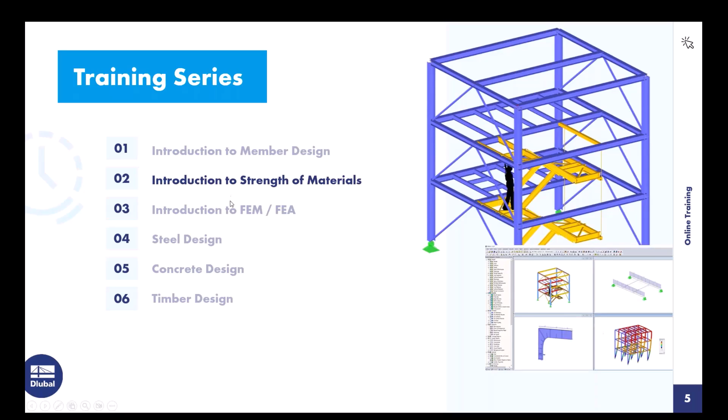This brings me to today's training program. I will first give you an introduction to the RSECTION program. Using several examples, I would like to show you the modeling options and design methods in the program. On the first example, a thin-walled I-profile is modeled with graphic functions. I will model this slowly so that you can enter this cross-section as well. In another example, I show how to insert cross-sections from the database and how you can add other parts to these cross-sections. Then I show the modeling of a massive cross-section based on a DXF template. Finally, I model a hybrid cross-section.

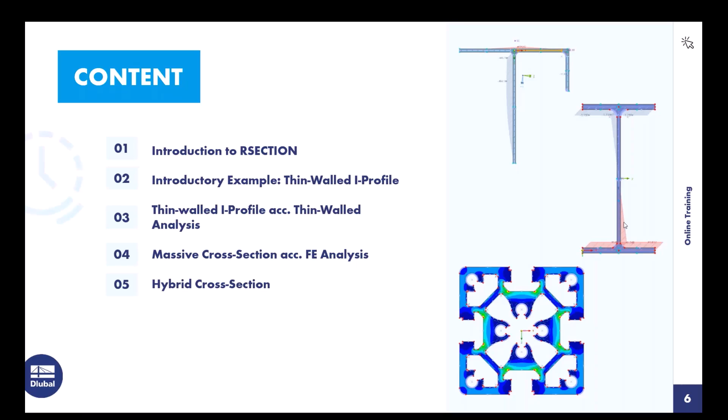RSECTION is an independently executable program for generating any thin-walled or massive profiles. If you want to design special profiles in RFEM or RStab that are not contained in the profile library, you can create them with RSECTION. You can then import these user-defined profiles into RFEM or RStab. In RSECTION, it's possible to calculate cross-section values and stresses.

The RSECTION user interface is the same as in RFEM 6 or RStab 9. The cross-section graphics and dialogues are displayed in the working window. Most tasks can be performed with a mouse. In the tables below, the keyboard is primarily used for numeric input and output of results.

There are 3 navigators in the left pane of the working window: the data navigator, display navigator, and results navigator. The data navigator manages the input data. A double click on an entry opens the dialog. Here, if I double click on the points, the dialog will open, and then I can modify this point.

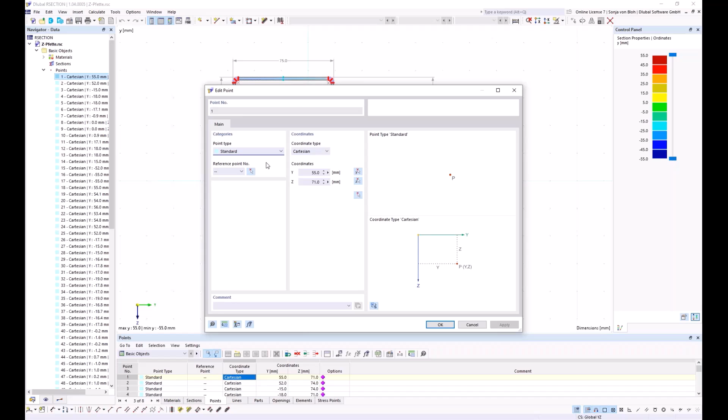It's also possible to open the dialogs for creating new objects. If I go to points, then it's possible here to add a new point.

The display navigator, I will turn to this, controls the graphical display in the working window. If the checkbox in front of an entry is unchecked, this object is hidden in the graphic. If I uncheck the points here, you see in the graphic the points aren't displayed anymore.

The result navigator controls which results are displayed. You can change here between statical moments, unit stresses, and so on.

Then I would like to go into the mouse functions. To move the section, you can hold down the mouse wheel and move the section accordingly. You can turn the mouse wheel to zoom in or zoom out, and right-click opens the context menu. You can also select objects with the mouse. If you open a window from left to right, everything that is completely within the selection area will be selected.

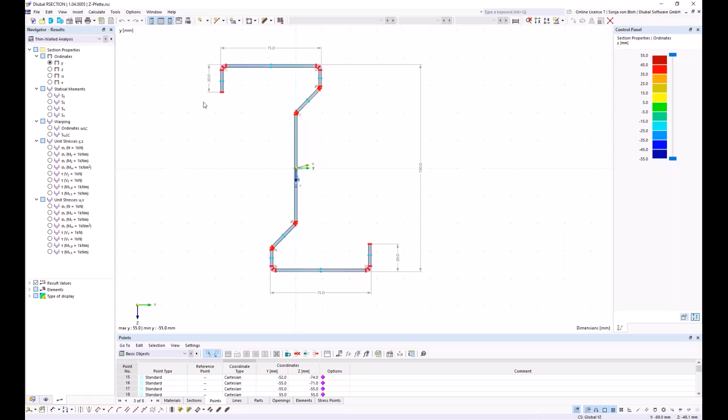If you drag a window from right to left, everything intersected by the selection area will be selected. You can also select individual objects. To do this, left-click on an object that you want to select.

To add objects to the selection, hold down the Control key and left-click on the next object you want to select. To remove objects from the selection, hold down the Shift key and click on the object you want to deselect. For the first part of the training, I am now starting a survey again.

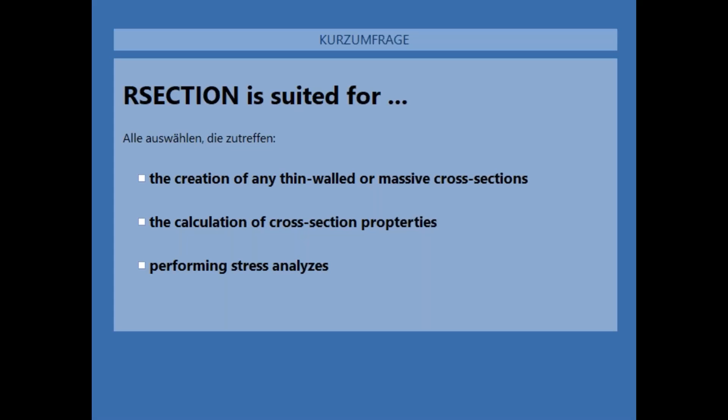All answers are correct. RSECTION is suited for the creation of any thin-walled or massive cross-section, and also for the calculation of cross-section properties and stresses.

This brings me to the first example. To create a custom cross-section, I open the new model window via this button here, and then I have to give the model a name. I name it here Example 1.

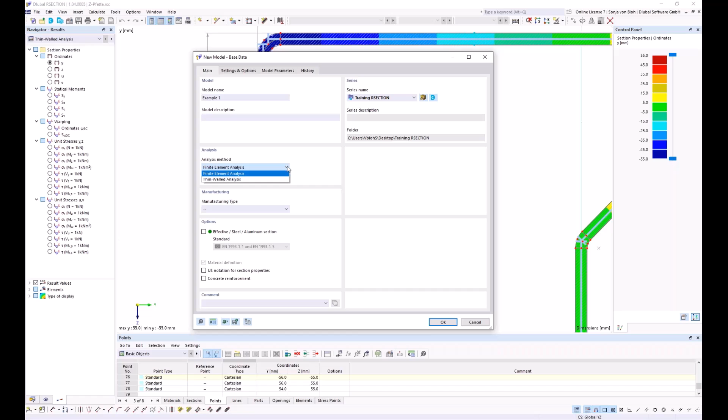Furthermore, the analysis method must be defined. This is here in this chapter, and the following analysis methods are available: finite element analysis and thin-walled analysis.

The effective cross-section can be calculated for both analysis methods after activating the extension here under the options. A standard must be selected according to whose rules the individual parts or subpanels are to be generated, and the effective cross-section is to be calculated.

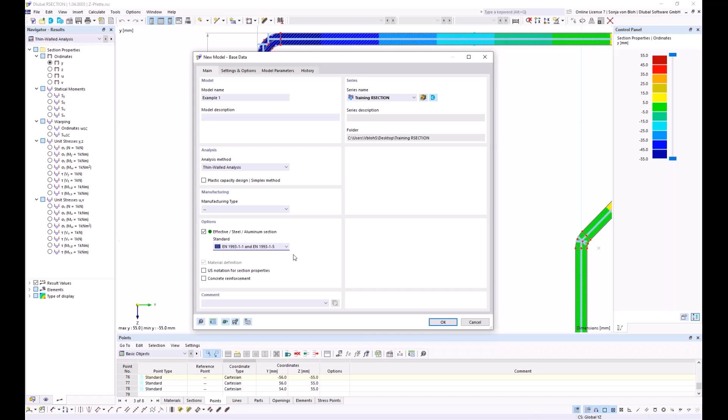The following standards are currently available: Eurocode 3 Part 1.1 for steel sections, Eurocode 3 Part 1.3 for cold formed sections, and Eurocode 9 for aluminum sections. I choose here the Eurocode 3 Part 1.1, and then I click on OK.

The selection of the design method or standard is irrelevant when using the RSECTION cross-section in RFEM or RSTAB. You can select the design method in RFEM or RSTAB regardless of what is set in RSECTION. Furthermore, the subpanels are generated in the design modules based on the standard selected in the design add-on.

In the steel design add-on, the manufacturing type determines which part of the standard is used for the design. For cold formed cross-sections, the standard Eurocode 3 Part 1.3 is used, and for hot rolled or welded sections, the standard Eurocode 3 Part 1.1 is used.

Now the file is created. I first define the material, and for this I open the Edit Material window. I can create or copy another material on the list via this button. This creates a new material, and this copies the selected material.

I can enter a material name here directly, and RSECTION then lists all materials that match that name. If I enter here 235, then RSECTION lists all materials with that name that are within this database.

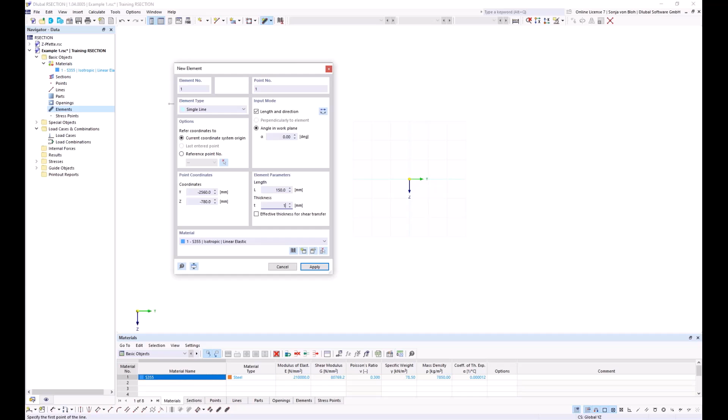I enter the element graphically, so I use this function single, and I enter the bottom flange here first. I choose the input mode, length and direction, and I choose an angle on the work plane of 0 degrees. I define for the flange a length of 150 millimeters and a thickness of 10.7 millimeters, and then I left-click here on the working window.

Then I create the web. Elements must be connected for the calculation of the effective cross-section. The connection is made via the start and end points of the elements. If two elements share the same points, they are connected.

For the web, I also use the input mode length and direction. Here I define an angle in the work plane of about 90 degrees, and I change the direction. Then I define the length of 289.3 millimeters and a thickness of 7.1 millimeters.

I create this web. Then I create the left flange, and for this I also use the input mode length and direction. Here I change the angle on the work plane to 0 degrees, and I change the length to 75 millimeters and the thickness to 10.7 millimeters.

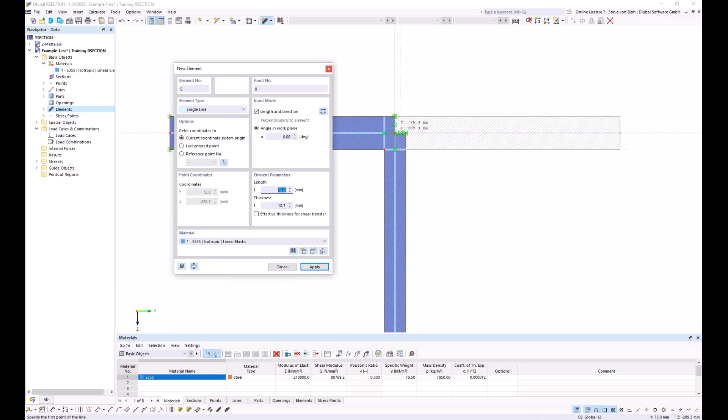Now I have to create the flange on the right side. For this, I reverse the direction, and then I create this element. I now click on the right mouse button. This closes my window. The profile should be a rolled T profile to which a lower flange is welded.

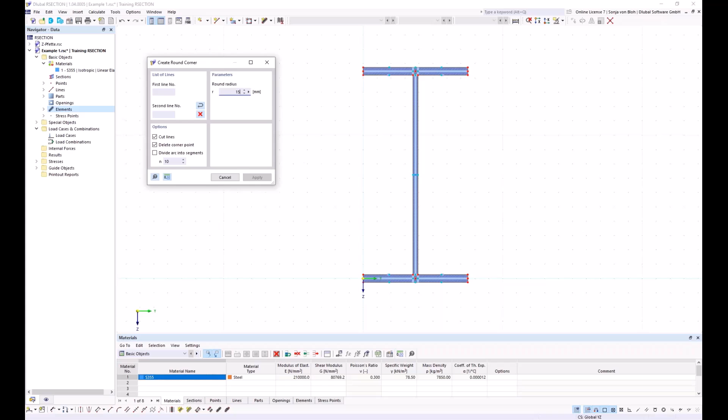The round radius is 15 millimeters. I can define lines to create them, or use the create round corner function. I find this function here below, and in this dialog I have to define the round radius. This should be 15 millimeters, and then I click on the corresponding lines.

Then I click on the right mouse button to close this window. The lower flange is welded with a 6 millimeter double fillet weld. I create the welds using the create angled corner function. I find this here. There are two corner types: both edges, where I can define the length of the edges, or the corner type edge and angle, where I can define just one length and an angle. You can also calculate in the dialog.

So I define 6 multiplied by the square root of 2, and I define here an angle of about 45 degrees, and then I click on the corresponding lines.

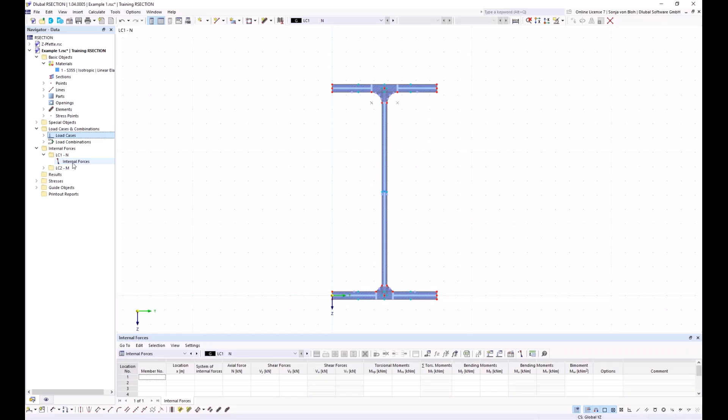I want to define the internal forces manually. For this, I go to the navigator data, open the tree internal forces, and then double click on internal forces. I want to define a compressive force, and compressive forces are negative, tensile forces are positive. Therefore, for a compressive force, I define here minus 10 kilonewton.

Then I click on apply and next, and I change the load case to load case 2. Here I want to define an axial force of 0 and a bending moment my of about 100 kilonewton meter.

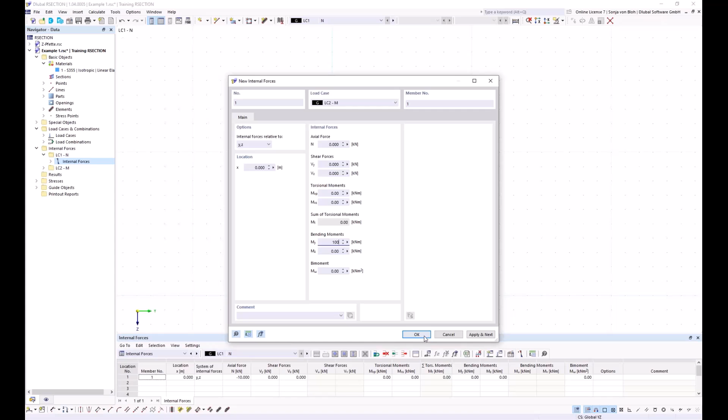And I click here on OK.

The blue dots that you can see here on the graphic are the stress points. Stresses are calculated and displayed at the stress points. The stress points are generated automatically, but they can also be defined manually.

I want to do that here, so I go to the navigator data again. I find the tree stress points, right click on it, and define a new stress point. It's possible to define the coordinates manually, or to select a point in the graphic and import its coordinates.

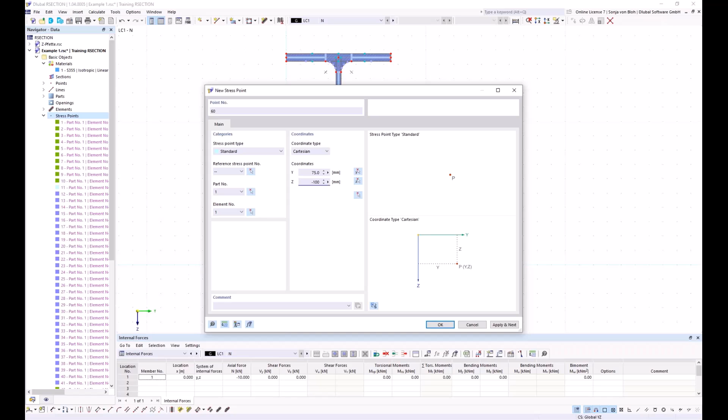I define here for the y direction 75 millimeters, and for the z direction minus 100 millimeters, and then click on OK. This stress point is now created. If I want to find it, I can right click on the stress point in the navigator data and use this function find, and you see now the stress point is located here.

Which stresses are to be calculated and output in tabular and graphical form can be set in the stress configuration, and you find the stress configuration also in the navigator data, under stresses, stress configuration. If you double click on it, the corresponding window will open.

Here via these checkboxes, you can check or uncheck the stresses that you want to calculate. Here, these stresses are calculated: the total normal stress, the total shear stress, and also the equivalent stress. I don't want to calculate more stresses, so I click on OK.

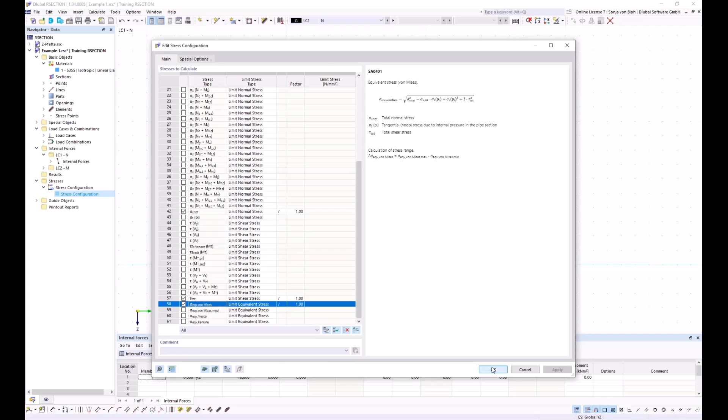I'll start the calculation now. For this, I choose in the menu calculate all.

In the result navigator, you can switch between the gross cross-section, this is the thin-walled analysis, and the effective cross-section, this is the effective thin-walled analysis. The same is possible in the result tables, where you also have the possibility to switch between thin-walled analysis and effective thin-walled analysis.

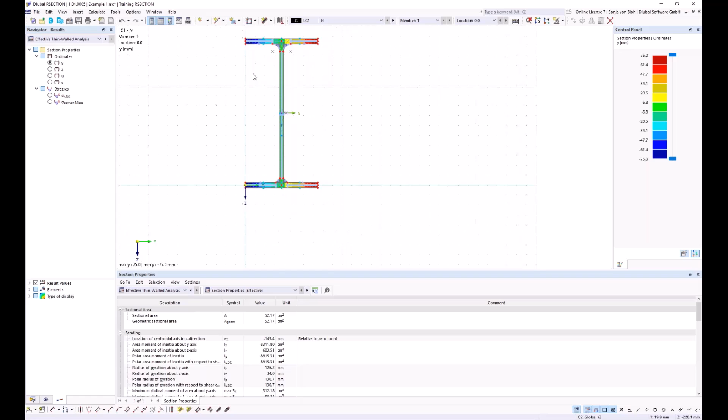Furthermore, you can switch between the results of the individual load cases, and you can also display the stresses. Now the stresses sigma x total are shown for load case number 1. If you want to see the stresses for load case 2, you have to choose that load case here.

I first look at the results of the gross cross-section of load case 1. The display type can be set also on the results navigator, where you can change the type of display. I change here, I choose off.

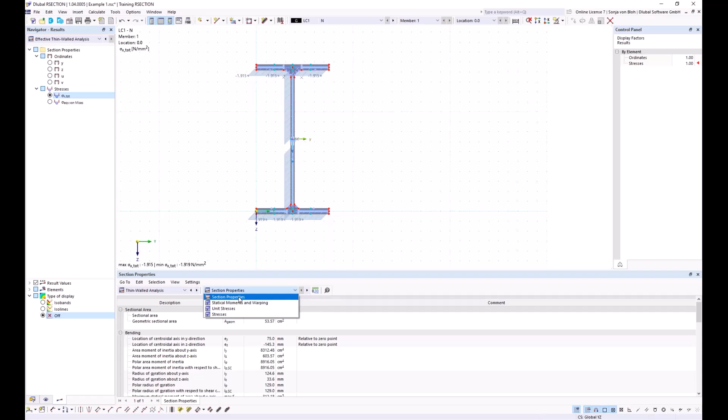I can see the cross-section values here for the gross cross-section. If I choose thin-walled analysis, then you can see the section properties. The section area is calculated, also the area moment of inertia about y and z axis, and so on.

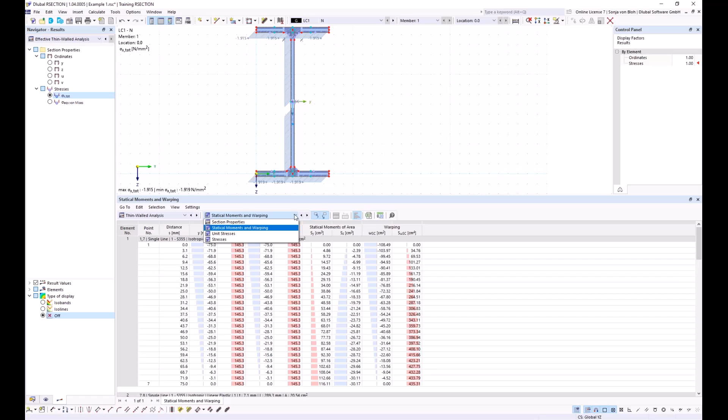Also, you can see in the tables the statical moments, and it's also possible to see here the calculated stresses numerically. It's also possible to show these results graphically. You can see here the statical moments, and you can see here also the stresses on the gross cross section.

If I now want to display the stresses at a specific stress point, I have to switch to the tab All Stresses by Stress Points. And if I choose this stress point that I have created manually, then the results of the stress point are displayed here on the table.

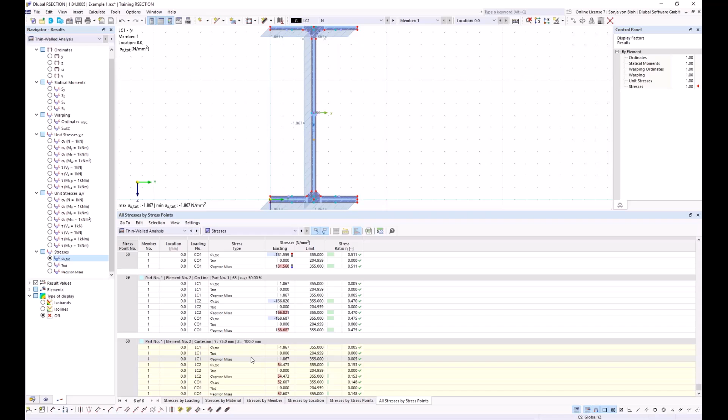In the case of the results of the effective cross-section, in addition to the results of the gross cross-section, there are also outputs for the classification of the cross-section and the effective width of the cross-section.

I choose the effective thin-walled analysis. I have here the section properties of the effective cross-section, and the section classification. I see that the section falls into class 4 for this load case, axial force.

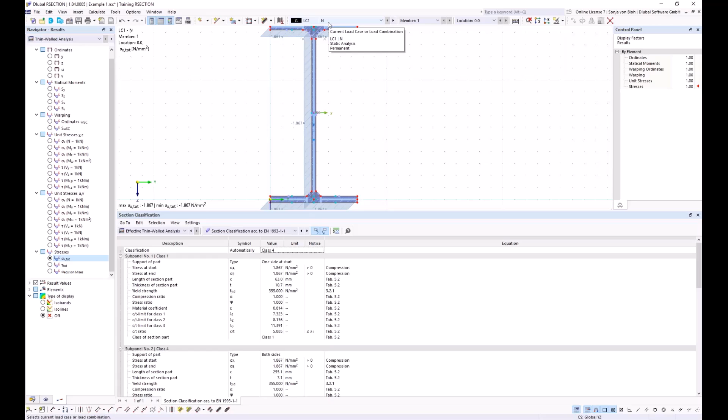Local buckling occurs in class 4 cross sections. According to the standard, the reduction in strength due to local buckling can be taken into account through effective widths, and you can see this here in the graphic.

If I change to effective thin-walled cross-section, then the web falls into class 4, and therefore the effective widths are calculated. Here an ineffective width of about 19.7 millimeters is calculated, and you can see this reduction graphically.

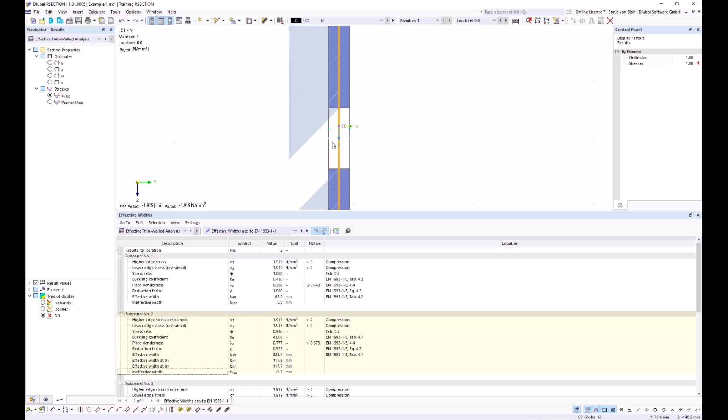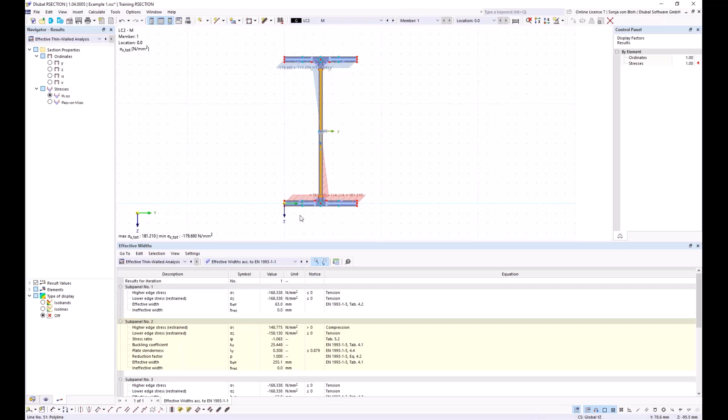It's also possible to look at the results of my load case 2. Then you can see that for load case 2, this cross-section falls into class 1, so no reduction is made.

I'm now starting a survey again regarding the requirements for cross-section classification. I start this. Multiple selection is also possible.

Okay, I close the survey and then I share the results. All answers are correct. For a classification, internal forces must be defined, elements must be defined, and it's necessary to activate the effective section add-on.

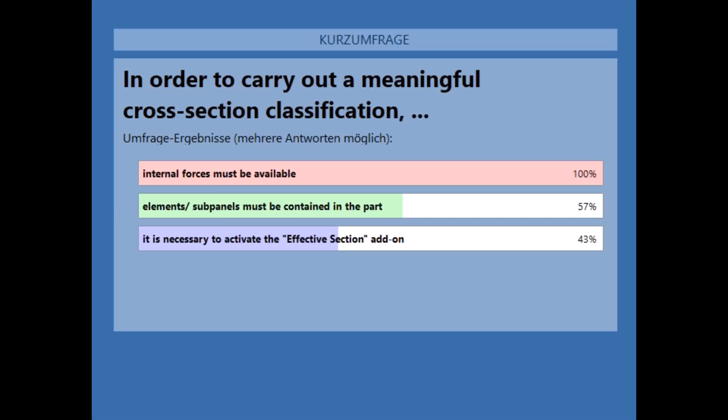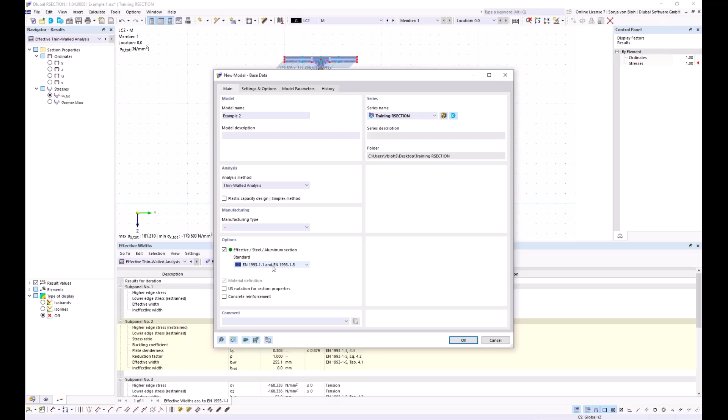I would now like to use another example to show you how you can access cross-sections from the library and modify them. For this, I create a new file. I click here on New File and name it Example 2. I choose the analysis method, thin-walled analysis, and I want to also calculate the effective cross-section, so I activate this checkbox again, and choose Eurocode 3 part 1.1. Then I click OK.

Then I define the material. For this, I double-click on the material and open the material database, and here I choose S235. Then I click OK, and now this material is defined.

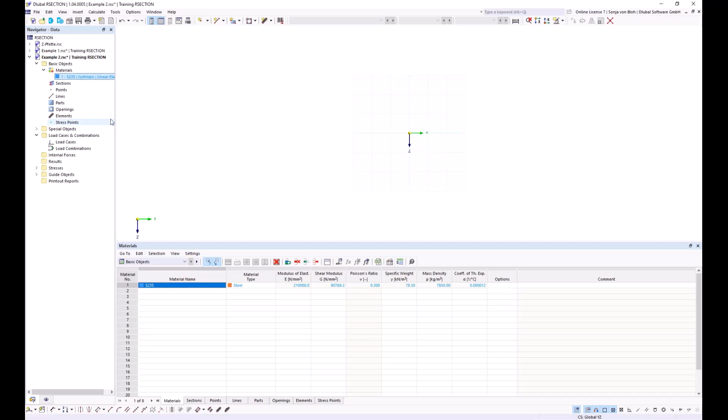Then I insert a cross-section from the cross-section library. To do this, I open the new section window in the data navigator. The window is structured like the material window. A cross-section can be created or copied via the list here. You can create a new section or copy selected sections.

A large number of cross-sections have already been entered into the cross-section library. I choose here standardized L cross-section. In the cross-section library, like in the material library, I have filters here on the left, or a search to quickly find the cross-section.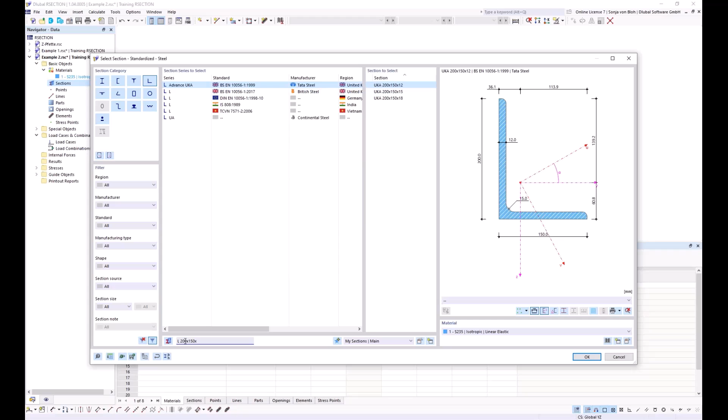I choose an angle L 200 x 150 x 12, and I choose this standard from DIN, and then I click OK.

The angle should be mirrored around the y-axis, so I activate this checkbox, and the angle should be also rotated about the x-axis, about 90 degrees. So I define 90 degrees here.

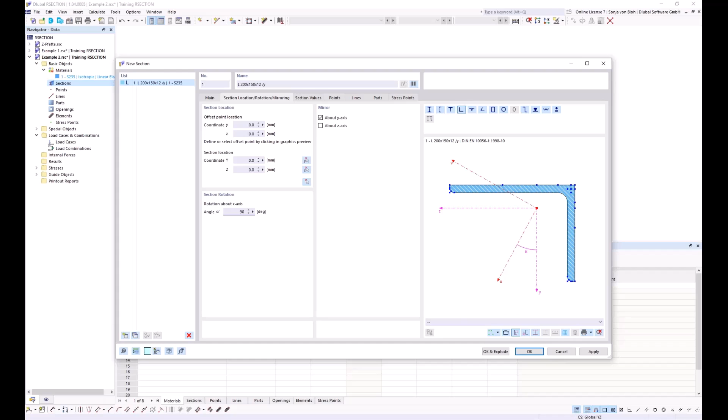Furthermore, I select the offset point in the graphic, and here I select this point, and at this point the cross-section is placed at the insertion point that you can enter here. You can enter it manually, or it's also possible to pick the location in the working window. I pick this location here, and then click OK.

When inserting this thin-walled cross-section, two elements are created, and also the corresponding part. The cross-section can be subsequently edited.

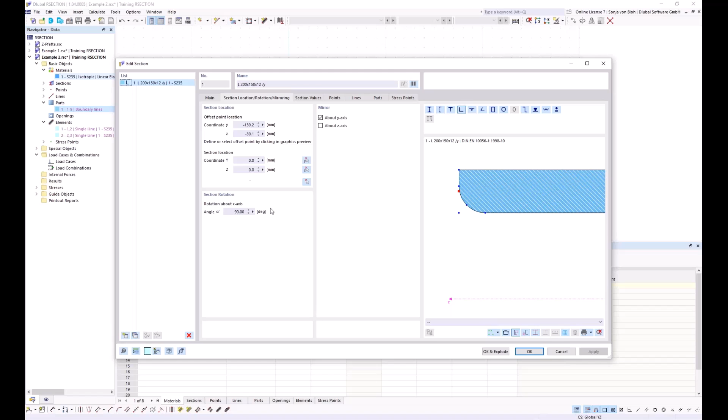If I double-click here, this opens the edit section dialog where I can change or modify the offset point locations and so on. It's also possible to move this cross-section or to rotate it via this function here.

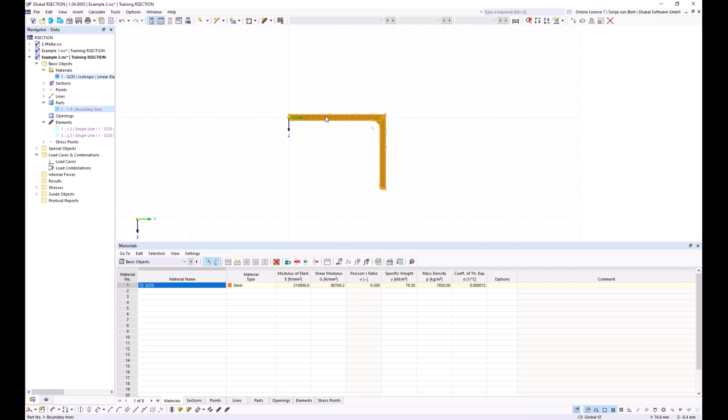However, in order to modify individual objects such as points or lines, the cross-section must be split. The cross-section is to be supplemented by further cross-section parts. I therefore split the cross-section into its individual parts, and I can do this by right-clicking on the section, then choosing the function Explode.

The fillet isn't needed, so I will delete that. I delete this point, and now the part is deleted too. Here you can see the elements are colored in red, and this means there's an error for the element.

For this element, the elements must lie in a part. The part is deleted, so here's an error, but I will create this part later.

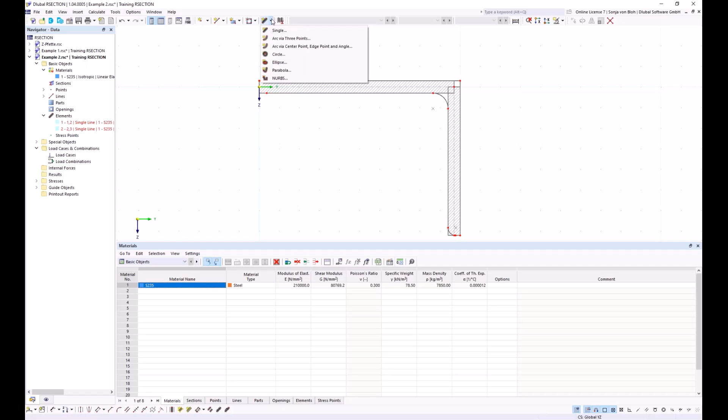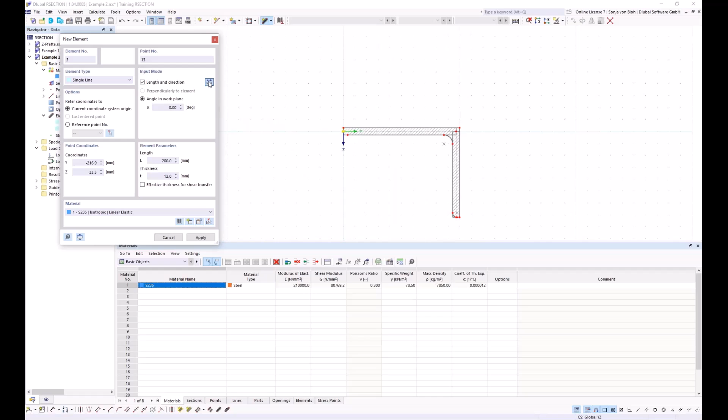I will now add more elements, and I will do this via the graphical input. So I select a single element, and I use also the input mode length and direction. The angle in the work plane is 0 degrees, and I define a length of 200 millimeters and a thickness of 12 millimeters.

Now the direction must be changed, so I click here on reverse orientation, and then I click on this point. Another element for the web should be created.

To do this, I use also the input mode length and direction. Here I define an angle of 90 degrees, and I have to reverse the orientation, and the length should be 400 millimeters and the thickness 10 millimeters. Then I click on this point.

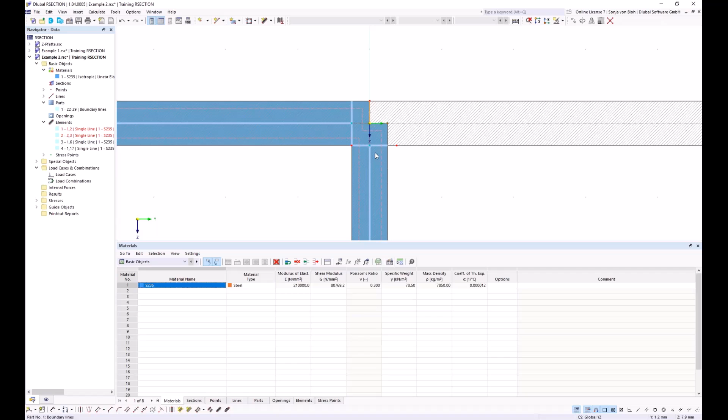I delete unnecessary lines. For this, I click with my left mouse button on this line, and then I click on delete. I will do this with this line also. I select it, then I click on delete.

Welding seams should be also taken into account in the cross-section properties. I create the weld using the angled corner function. So I open this dialog again.

I choose the corner type, edge and angle, and a 6 millimeter double fillet weld is to be defined, so I define here 6 multiplied by square root of 2, and I define an angle of about 45 degrees, and then I click on the corresponding lines.

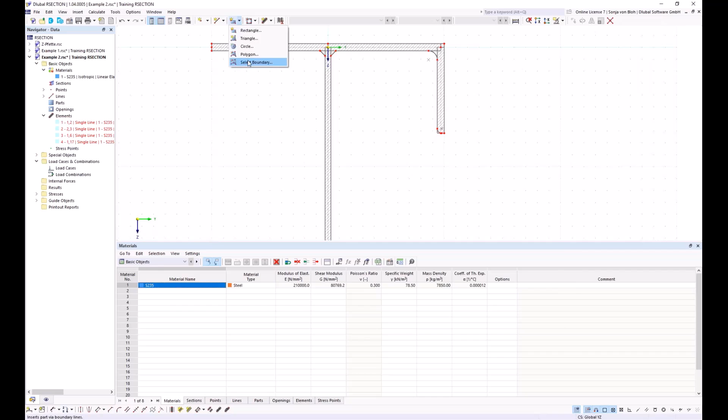Furthermore, I still have to create the part, and I will do this using a function I can find here: select boundary. For the new part, I have to define a material. This should be the created material, S235. Then I click OK, click on a line, and the part is created. The cross section is now complete.

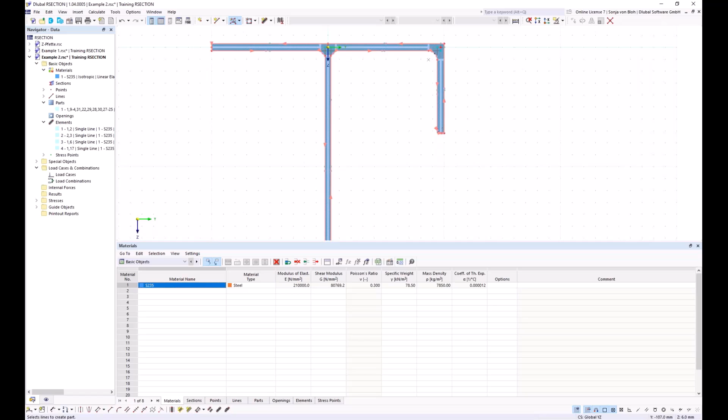I would now like to calculate the effective cross section and the stresses, so I create load cases and internal forces. I create the load cases first.

For this, I go to the navigator data and choose here new load case. I name this load case N, and I create another load case via this button, create new load case, and I name this load case M.

I also create a load combination. For this, I go to the tab load combinations, click on this button, create new load combination, and then I add all load cases to my load combination. Then I click on OK.

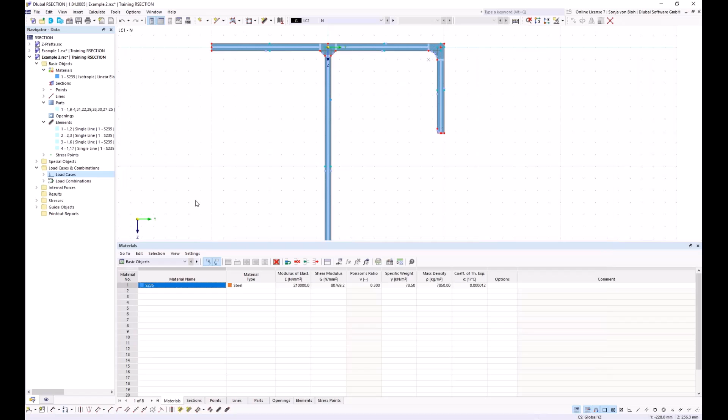Then I have to define the internal forces. To do this, I go to the navigator data, open internal forces, and then I define here an axial force about minus 50 kilonewton. I click on apply and next.

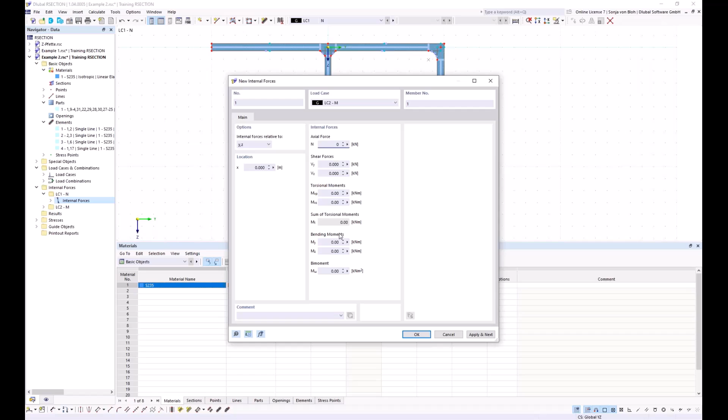I change the load case to load case 2. I define here an axial force about 0 kilonewton and a bending moment about 20 kilonewton meter. And then I click on OK.

Then I start the calculation. I choose here calculate all, and I look at my effective cross-section.

This cross-section falls in load case 1, also in class 4. I can see here the reduction, and I can see the reduction also in the tables. I can see here the section classification, class 4, and the effective width here for this sub-panel.

I also want to create a printout report, and I will do this via the navigator data. You find here this printout reports below, and then I click on a new printout report. Then I have to check the report items that I want to add into my printout report.

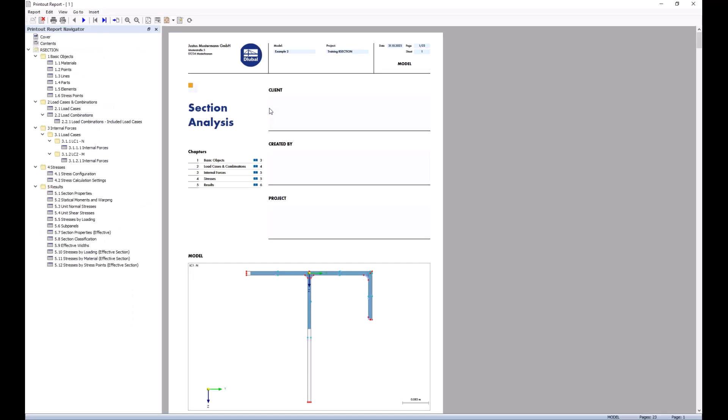I can see here the numerical results. It's also possible to add graphics to the printout report. To do this, I hide this printout report, and I use here this function, print graphics to the printout report.

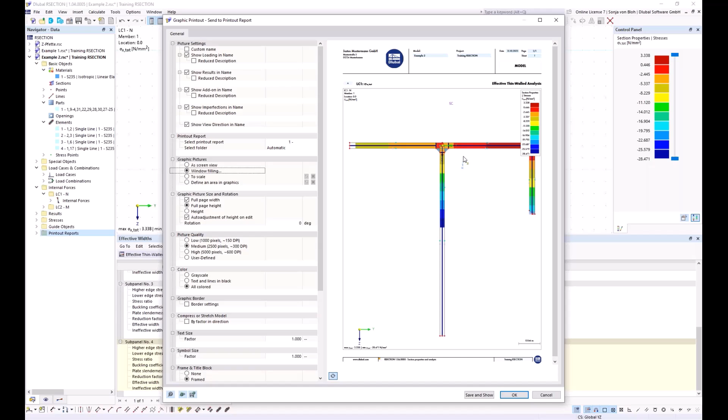In this window, it's possible to define the size of the graphic. Here I choose a window filling. I can see now the preview, and if it's okay, I can click on the button Save and Show. And now this graphic is added to the printout report.

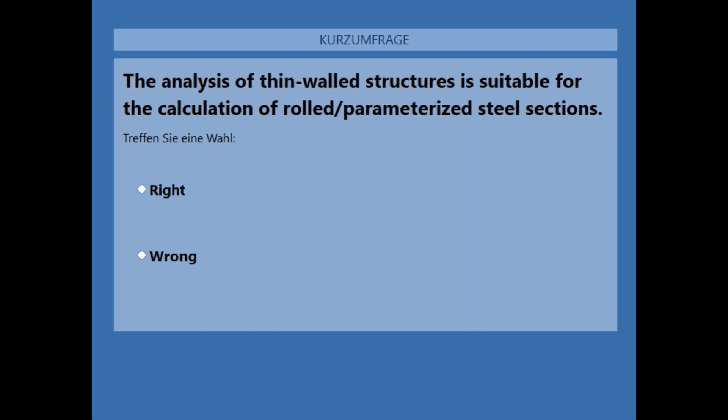I will now close the survey and share the results. The correct answer is that the analysis of thin-walled structures is suitable for the calculation of rolled/parameterized steel sections, and you have answered this correctly.

In the next example, I would like to show you that you can also create cross-sections by importing a DXF file. A DXF file can be imported via menu File, Import DXF. Then I have to choose the corresponding DXF file, and then I click here on Open.

I don't want to import the DXF file into the active model. I want to create a new one, so I click here on No. And then a new window opens.

In the section Create RSECTION Model, you have three options for creating the cross-section. The automatic creation of elements is useful if the outlines of the cross-sections are available in the DXF file. RSECTION attempts to create center lines for parallel lines and then set the elements between the intersections. Only elements that do not exceed the maximum thickness that you can define here are created.

The import function, use DXF template lines as center lines, is useful if the cross-section geometry is available as a center line model. The lines of the DXF template are considered as the center lines of the elements. The thickness defined in the field T is assigned equally to all elements.

The function create DXF template is useful for massive cross-sections where no elements need to be created. In addition, this function can also be used for complex cross-sections where I only want to create elements for the decisive cross-section parts. With this import function, the lines in the DXF file are imported as lines.

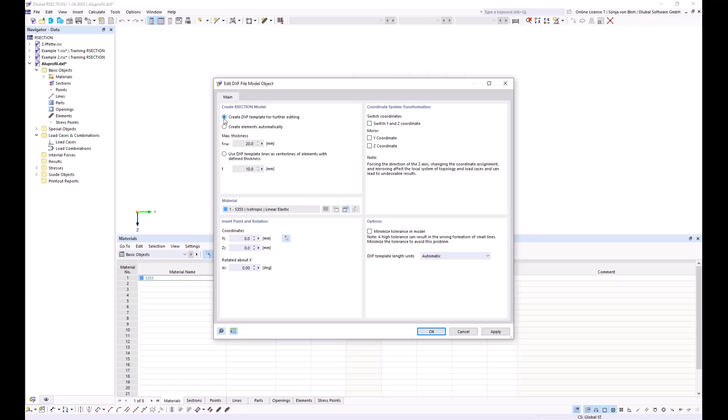You can then use these lines as an aid for modeling. I choose this option now, click on OK, and now the lines are created.

A finite element analysis is to be carried out. To do this, I go to the base data and choose the analysis method, finite element analysis. This should be performed on massive cross-sections, such as timber or concrete cross-sections, in contrast to thin-walled cross-sections, where stresses can be regarded as constant across the cross-section thickness. The stress distribution in solid cross-sections is variable and can only be determined with a finite element analysis. So I choose this analysis method now, and click on OK.

Then I have to define the material. I modify the created material, which should be an aluminum material. I open the material library, change the filter to aluminum, and use the search function to define a material, EN AW 6060.

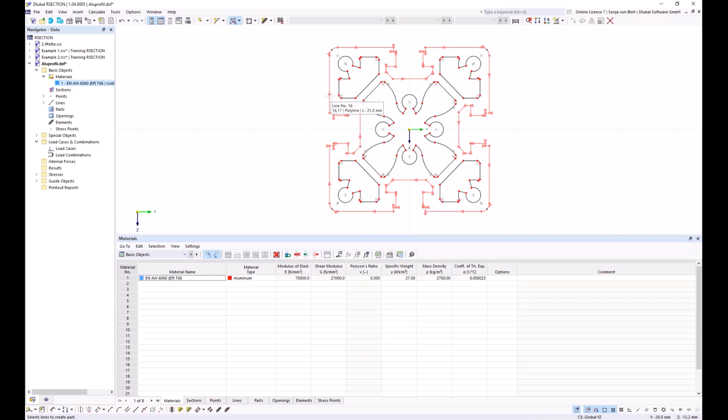I choose this material at the bottom and click on OK. In a finite element analysis, only a surface needs to be defined, meaning only the part needs to be defined, but no elements. I would only need to define elements if I also want to calculate the effective cross-section or carry out a classification. So I only create the part here, using the function select boundary. I click on OK, then click on a boundary line, and now the part is created.

I still need to create the openings. I create them using the function select boundary, then click on the boundary. I can create the other openings by rotating them.

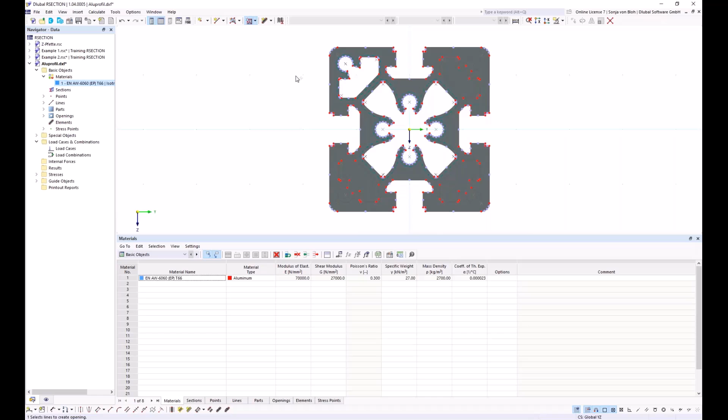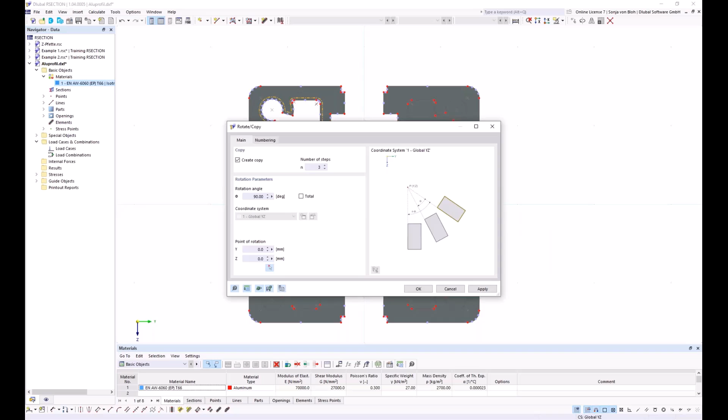I want to show you this as well. First I select the opening I want to rotate, then choose the function rotate selected objects. I want to create a copy, with 3 copies, so I define a number of steps of 3, and the rotation angle should be 90 degrees. Then I define the point of rotation, which I can also pick in the window. If I click on OK, the openings will be created.

I want to calculate the stresses here as well, so I create load cases. For this, I go to the navigator data again, right click, and choose new load case. I define a load case N, and also a load case MT, then click on OK.

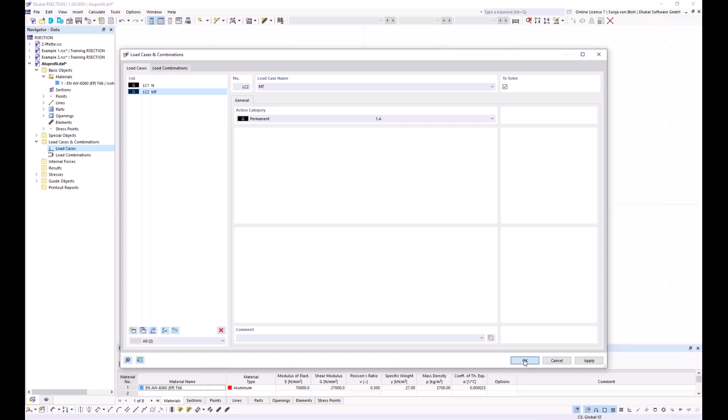Then I define the internal forces, again via the navigator data. I open the internal forces dialog and define an axial force of about minus 10 kilonewton in load case 1, click apply and next. Then I go to load case 2, and define a torsional moment of about 0.3 kilonewton meter, then click on OK.

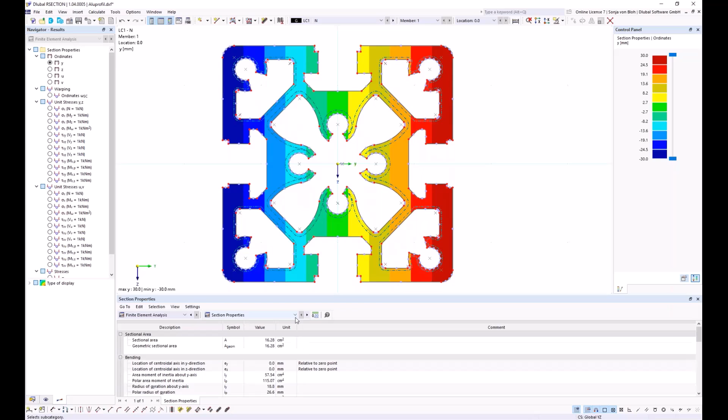Then I start the calculation via the menu calculate all, and now the finite element analysis is carried out. I have the section properties and stresses in tabular form, and I can also see the stresses graphically. If I choose, for example, sigma x or tau total, I have to change to load case number 2, and you see now the results graphically.

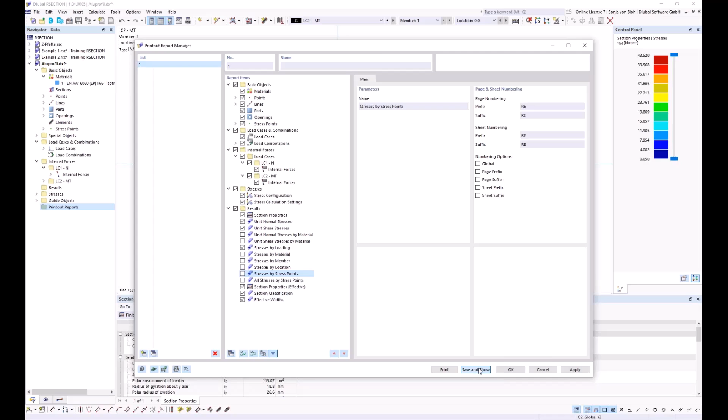I want to create a printout report for this as well. I go to navigator data again, right click on printout report, and choose new printout report. Here I choose the report items. I don't want to see the stresses by material, member, location, stress points, and so on. Then I click on Save and Show, and the printout report is generated.

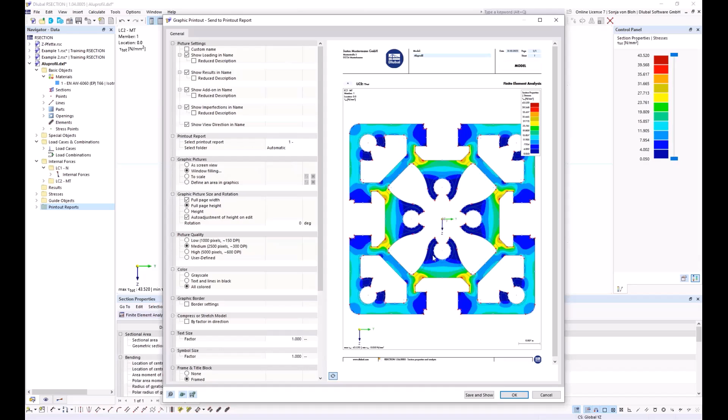I want to also add a graphic to this printout report, so I go to the function print graphics to printout report. This should be window filling. Then I click on Save and Show, and now this graphic is also added to the printout report.

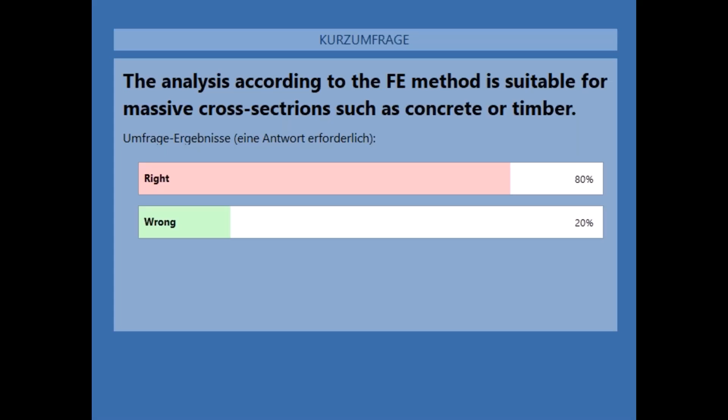As a last example, I show the modeling of a composite cross-section. In RSECTION, it's also possible to model cross-sections that consist of different materials. Ideal cross-section values are determined for such a cross-section. A 1000 millimeter wide and 200 millimeter high concrete cross-section lying on an HEB steel cross-section is modeled in this example.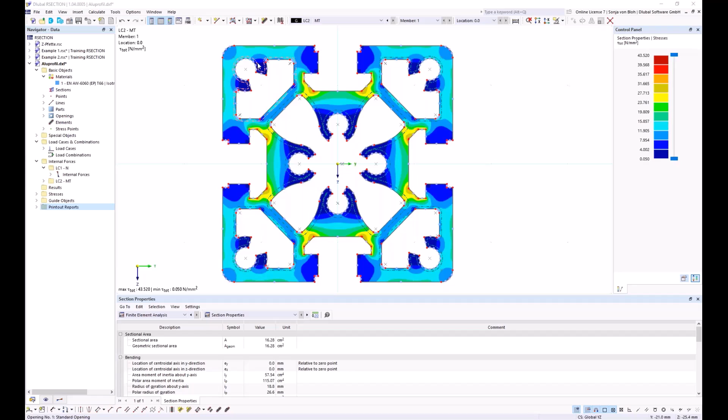For this, I create a new file and name it example 4. I choose the analysis method finite element analysis, and then I click on OK.

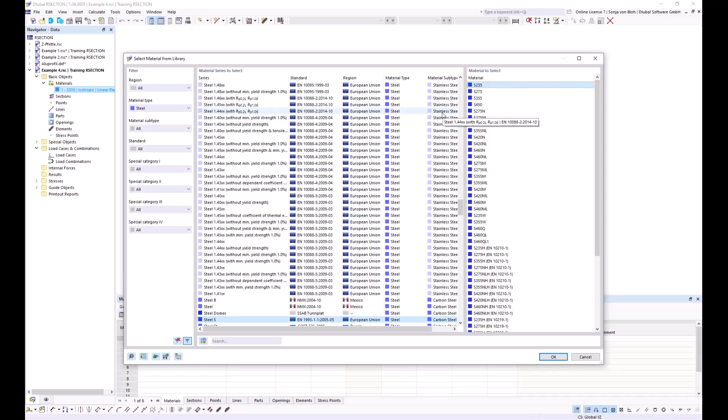I define two materials. For this, I open the material window, and for the first material, I define a steel material. This should be an S235. I open the material library and choose the S235 material, and I add a new material, a second material, to the list. I will do this via this button, create new material.

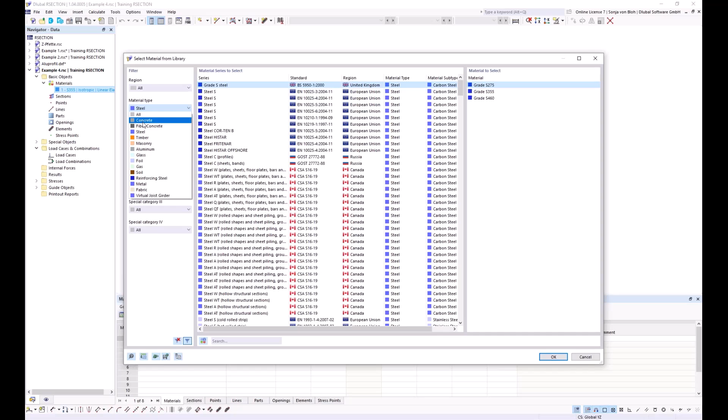Then I open the material library again. I choose the material type concrete, and I want to choose a C40/50 material. Then I click on OK, and also OK. The first material is always the reference material. In RStab or RFEM, however, I have the option of defining other materials.

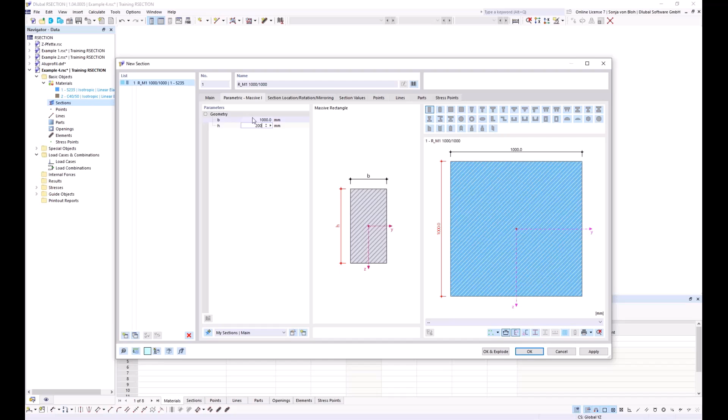First, I model the concrete cross-section with a dimension 1000 to 200 millimeter, and I will do this via section. So I go to Navigator Data, New Section. Then I open the section library, and I choose a massive rectangle cross-section. Then I define for B 1000 millimeter, and for H 200 millimeter, and I define a material.

The concrete material for this. Then I click on OK. Now this cross-section is inserted into the file, and I create a second cross-section. For this, I go to Navigator Data again, New Section.

This should be the steel cross-section. For this, I open the section library again. I choose I-beams, H-beams, and I define an HEB of 400. I choose this one. I choose the material S235. I click on OK, and I choose the center of the top flange as the offset point.

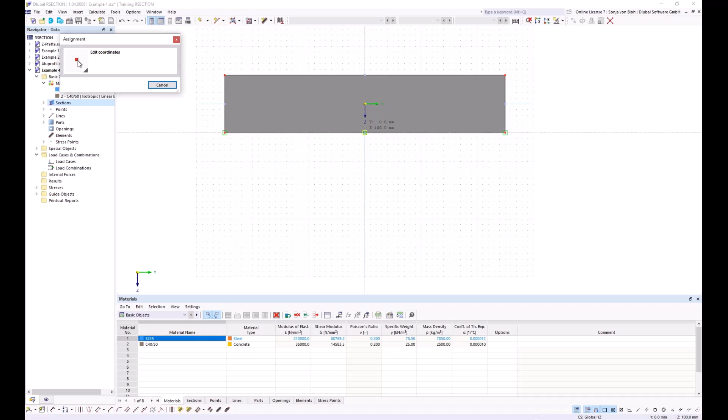So I click on this point in the graphics, and I choose the section location, here the bottom of the concrete rectangle. Then I click on OK.

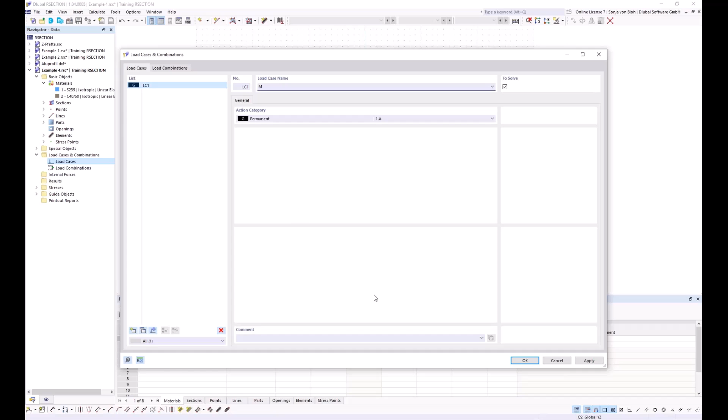I want to calculate also the stresses, and for this I create a new load case. So I go to Navigator Data, new load case, and I define the load case name M. I click on OK, and in load case M, I define a bending moment about the y-axis of 100 kilonewton meter. I now start the calculation.

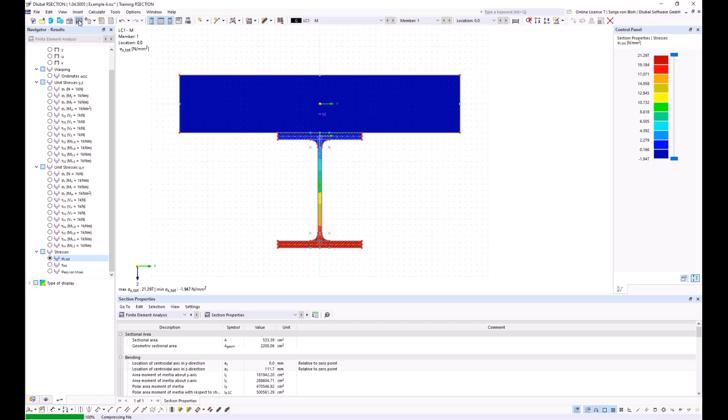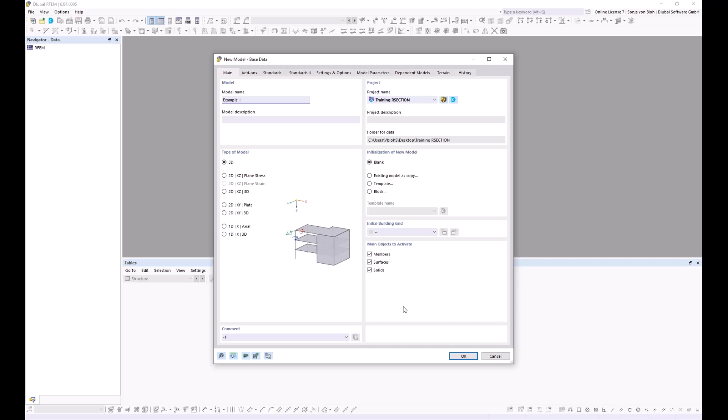I can see the stresses, and I would also like to show you how to import the cross-section into RFEM. To do this, I first save the cross-section, and I now open RFEM 6, and create a new file. I name it example 1, and then I click on OK. Then the new file will be created.

Then I import the RSECTION cross-section into this file first. For this, I go to Navigator Data, right-click on Sections, New Section, and then I open the section library, and here I have the possibility to import a section from RSECTION. I click on this button, and this opens the Dlubal Center. And in the Dlubal Center, I choose this example 4. I click on OK.

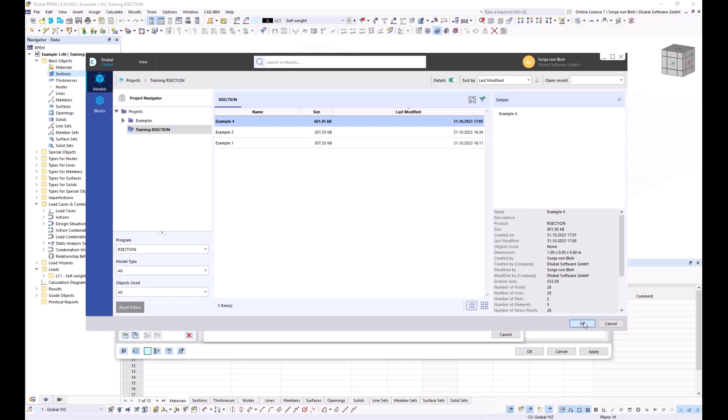And now this cross-section is available in RFEM 6. I have here also the tab hybrid, and here you can see the material assignment. If you want to, you can also change the materials here for parts 1 and 2, and it's also possible to change the reference material.

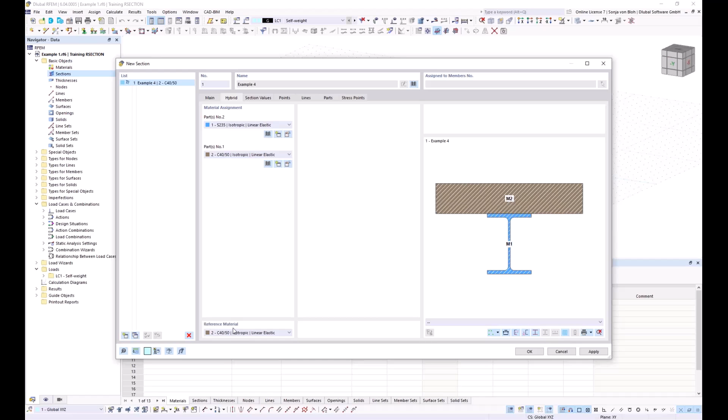It's also possible to create a member with this cross-section. To do this, I click on New Single Member. Then in tab section, I choose this cross-section, which is my example 4, and then I create this member.

With this example, I have come to the end of the training. It was taught how you can create general cross-sections with graphic functions, how you can add cross-section parts to database profiles and create profiles based on a DXF import, and also how to create hybrid cross-sections.

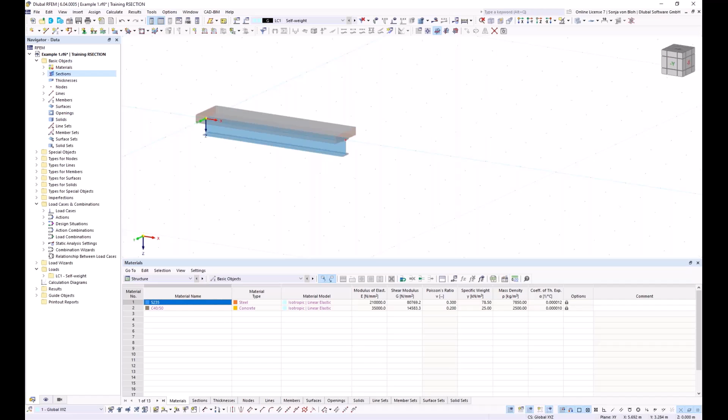Finally, I would like to show you where you can find more information on our website. You will find in tab Support and Learning frequently asked questions. You can also find knowledge base articles, news and events, and our webinars.